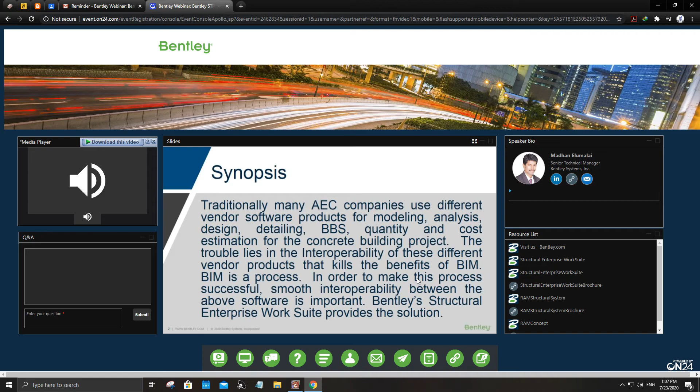So the synopsis for today's presentation is: traditionally we see many AEC companies use different vendor software products for modeling, analysis, design, detailing, bar bending schedule, quantity, and cost estimation for concrete building projects. The trouble lies in the interoperability of these different vendor products, which kills the benefits of BIM.

BIM, as many of you know, is a process, not a product. In order to make this process successful, smooth interoperability between the above software is important. Bentley's Structural Enterprise Worksuite provides the solution. And that's the synopsis for today's presentation.

In many bigger organizations, we see that BIM is getting implemented, but because of this BIM implementation, are you more effective than before or not? That is the important thing we need to find out.

One of the important things to make this BIM process successful in your organization's implementation is to make sure the softwares you use to complete the project are interoperable. If not, you'll be duplicating the work in the same office, and instead of gaining efficiency, you'll be losing efficiency, leading to BIM failure. So with that message, I'll move on to the next slide.

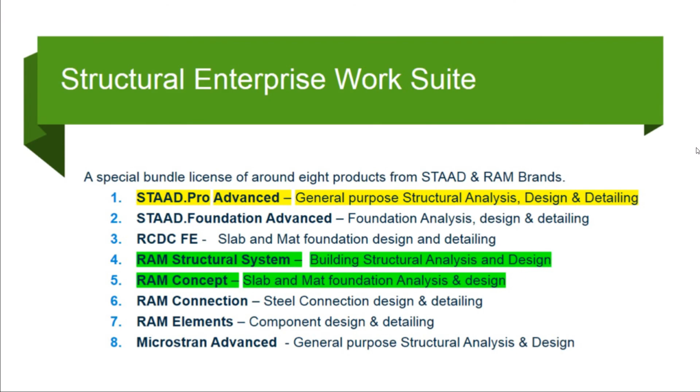So let's go into detail of RAM products overview. What structures are designed using RAM? Office buildings, residential buildings, education buildings, medical campuses, public structures, retail structures. Structural steel, reinforced concrete, post-tension concrete, timber, masonry, foundations.

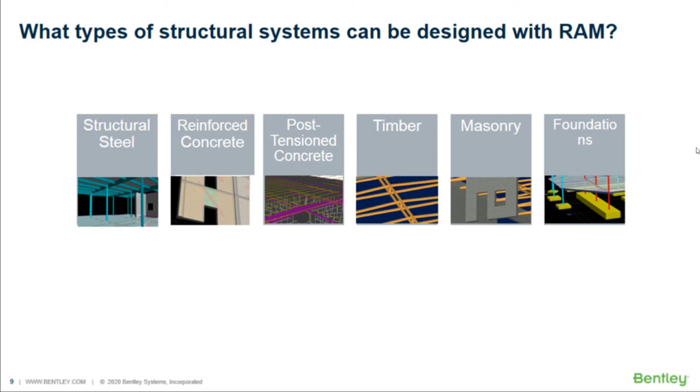Why use RAM? RAM, as I mentioned, is not a general purpose program. It's a special purpose program custom made for buildings. You cannot use this program for any other structure other than buildings.

Comprehensive implementation of building codes, such as live load reduction code, load combination code, seismic code, wind load code, as per all international codes, are implemented in this program. Extensive automation of tedious and time-consuming tasks like skip loading, alternate span loading for live loads on a 3D building, and many other time-consuming tasks are automated here.

Basically, RAM suite consists of four softwares: RAM Structural System, RAM Concept, RAM Connection, RAM Elements. RAM Structural System is for 3D modeling, analysis, and design of buildings, could be steel or concrete. Today we'll focus on concrete buildings and tomorrow on steel buildings.

RAM Concept for concrete slab and mat foundation, we'll see that today. RAM Connection for structural steel connection design, we'll see that tomorrow. RAM Elements, design toolkits for structural components, we'll see that on some other day.

So on the screen now you can see a 4-story building. The bottom 2 floors are made of concrete, the top 2 floors are made of steel. You can see the various RAM modules and RCDC used for analysis and design of this building. Basically, the whole building, including the steel and concrete and composite and non-composite floors and one-way and two-way floor slabs and flat slabs, are modeled in RAM Structural System as a whole model.

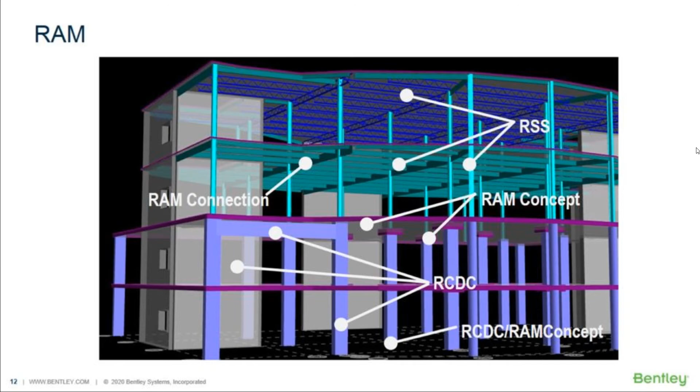The first case study is on Iraq. Here you can see the building. It is not the deflected shape of the building, it is the in-place condition of the building. This is a US $21 million landmark building project by Hamkar, consisted of 2 towers, each with more than 20 stories. The challenge was executing the vision of the architecture, which resembled falling dominoes, or in an alternative vision, a falling tree grounded by its roots. This project was designed by the consulting engineer Hawar Farhad Ahmed.

For such innovative architecture, RAM Structural System was critical for the team's analysis using finite element mesh. The project team collaborated by increasing communication across teams within a virtual workspace. The team achieved ROI by clearly defining the potential return from local investment, including reduced overhead, higher employee retention, improved operating efficiencies, and controlled pricing.

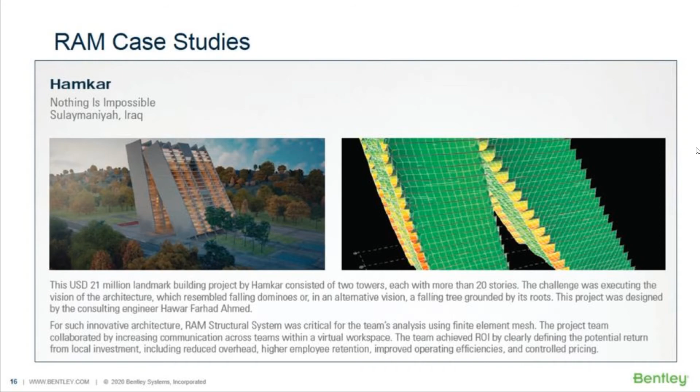It's a deluxe waterfront apartment development that addresses demand of upcoming upmarket housing. Wood and Grieve engineers provided structural analysis of unique architectural features such as the sophisticated facade and ground foyer. The building's radial layout with non-uniform column arrangement and slab design also required special considerations.

RAM structural system provided an efficient means to perform load takedowns and easily accommodate changes in the preliminary analysis phase. RAM concept allowed the floor design to be imported from RAM structural system to minimize repeat modeling. This improved productivity, so less time was spent building models and more time was spent evaluating scenarios. RAM's interoperability was an important factor in reducing cost.

So these are the cases submitted by these two users in our Year in Infrastructure projects in the past. We have taken from their presentation with their permission. So coming to today's presentation on concrete modeling, building modeling, analysis, design, and detailing.

I want to spend more time on modeling because the users here are not fully aware of the RAM structural system features. So first, let's see the first step, that's the workflow. We can do the modeling in either BIM softwares using Revit or Open Building Designer, or you can do the modeling in RAM structural system itself. You can see the two-way arrow.

After we finish the modeling and analysis in RAM structural system, we can proceed with the design using RCDC, and proceed with RAM concept for slab design and mat foundation design. The interoperability with RCDC is just one way, and the interoperability with RAM concept is two-way.

RCDC is otherwise called STAAD Advanced Concrete Design, which is part of STAAD.Pro Advanced, all part of the Structural Enterprise Worksuite license. So the way we model in RAM structural system is exactly the same way we model in BIM softwares like Revit or Open Building Designer.

So I'm going to use for this project the modeling in RAM structural system, importing and creating grids, and gravity and lateral modeling. After we finish the modeling, we do the lateral loading and analysis as step 3.

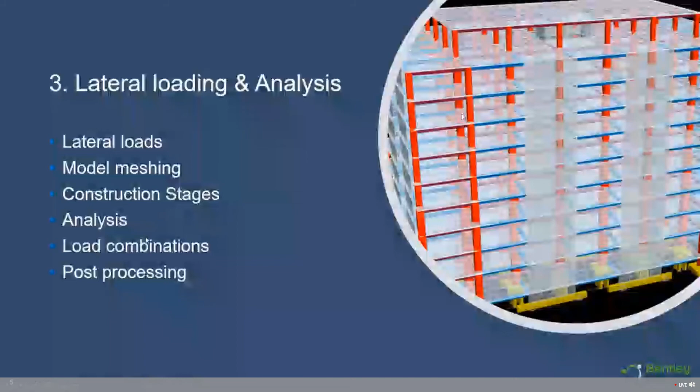We create construction stages here before we do the analysis, load combinations, and we do the post-processing. Stage 4, we do the concrete gravity analysis, this is for the gravity members. Stage 5 is the concrete design, detailing, and estimation. And stage 6 is the mat foundation design.

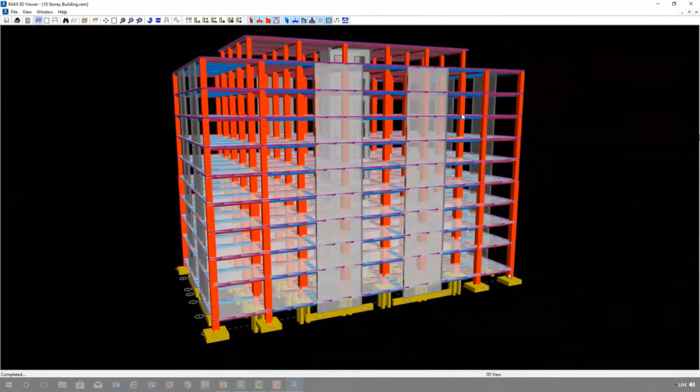So now we'll start the live demo, starting from number 2, that is modeling the building. I'm going to open up the already completed building before I show the modeling. So let's see this building. It's a 10-story building. The span is 6 meters by 7, so 42 meters in the X direction, and 5 by 5 is 25 meters in the Z direction.

In RAM structural system, we call it the X and Y direction in the plan, and vertical is Z, unlike STAAD Pro. You can see the red color members are lateral members, and some beams you can see blue color and red color. Columns are all red color. I model it everything as lateral columns. Shear walls are also lateral walls. And beams, most of them are lateral, some of them are blue, which is gravity.

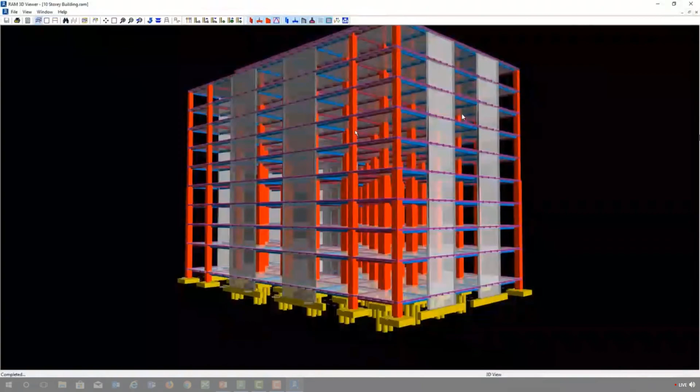And I model almost all kinds of foundations: isolated footing, combined footing, pile cap, and mat foundation. I also model the shear wall with openings.

Okay, so I hope now you have an understanding about this building, the 10-story fully concrete building.

Okay, so now I'm starting a new file, and this is the first screen where you see all the modules of RAM structure system here. All are empty right now. We are going to now start the modeling.

I use the RAM modeler and then choose the material. Here I'm going to use the concrete material. And then the first thing I'm going to do is specify the layout, the floor layouts. I'm going to use 2 floor layouts, typical one, and a roof for this 10-story building project.

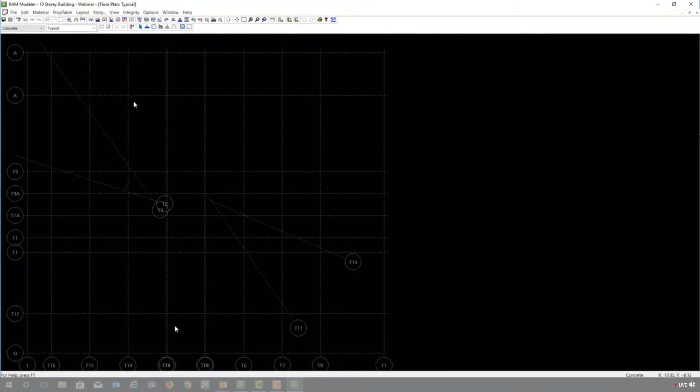So you see, I imported the grid from the CAD software, which includes orthogonal, inclined, and radial grids, so that I don't need to spend time creating the grids and can start creating the model. But for this project, I'm going to show you how to create the grids from scratch.

I'm redoing the floor layout creation, and now I'm going to create the grids manually so you understand both processes well. I'll create X grids, labeled in alphabetical order in the X direction: 8 grids with 6 meter spacing. In the Y direction, I'll label numerically: 6 grids with 5 meter spacing.

I'm going to insert a grid and name it 3.1, with a coordinate of 13 meters in the Y direction. That is a user-defined grid. Now we can visualize this grid here on the screen. Hope you are able to see the grids.

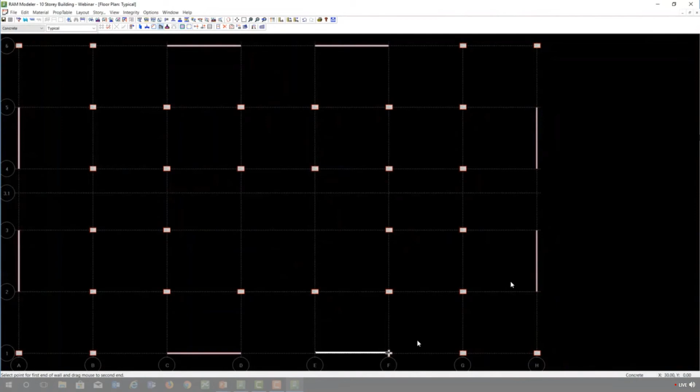Okay, let me continue. So now I finished the column modeling. Now I'm going to model the walls—just using the grid, I can quickly create the walls. I finished the walls on the 4 sides. Now I'm going to model the beams.

I'm modeling the lateral beams, shown in red, and also the gravity beams, shown in blue. I'm modeling these as gravity beams because one side connects to the wall and the other side connects to the lateral column, so achieving rigid connectivity with the wall would be difficult. That's why I'm using a simply supported connection where it connects to the wall—that's why I'm using gravity. But it's up to the engineer to decide whether to use lateral or gravity.

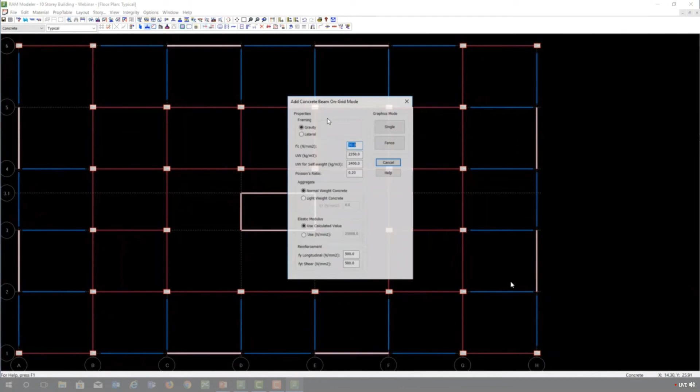I want to demonstrate the capability of modeling gravity members and lateral members in RAM Structural System, which is a unique feature I like a lot. A lateral member takes both lateral loads and gravity loads, whereas a gravity member takes only gravity loads. This way, the engineer has total control over the distribution of lateral load into the building.

So I finished modeling the shear wall lift core, and now I'm showing you the releases. You can see the gravity members have pin end connections. I'm going to modify some of the gravity beams that connect to the lateral columns using the Assign Beam Fixity command, so you can change the member releases.

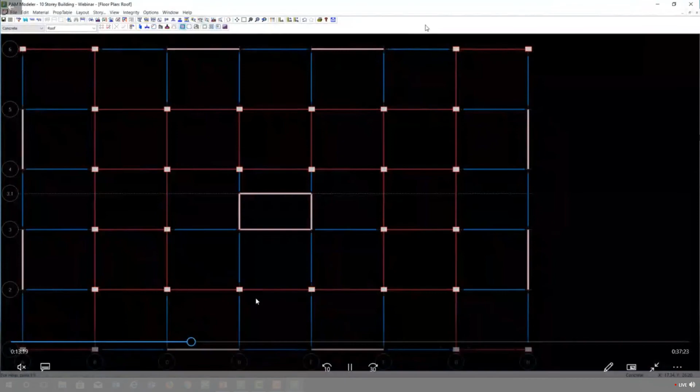I'm going to skip some of this to save time. Next, after modifying all the releases, I'm going to copy this floor to the roof and delete some of the members to create my roof floor layout.

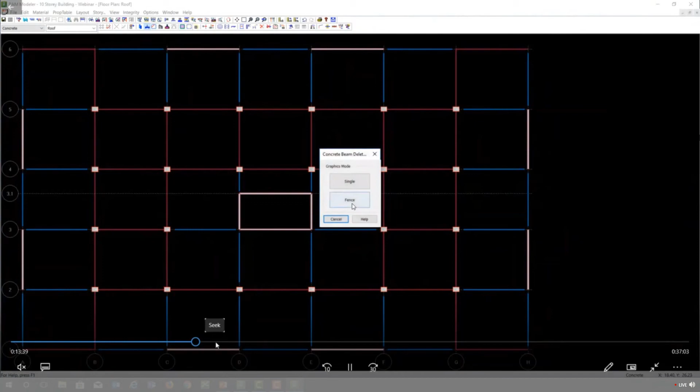Okay, so after I copy that roof floor layout, I think I skipped that copying, which is an important feature, so I'll show that now. Sorry for that, I'm trying to save time here because we lost some time sharing the video.

Using the copy feature, the story copy flow, I copied the typical floor to the roof. Now we are in the roof floor layout, which you can see in the top left. And in the roof floor layout, I'm deleting some beams and columns.

This now shows the slab modeling and the opening modeling in the slab. For the roof, I deleted the slab. I'm now going to delete some of the beams and columns. So the end result is going to look like this.

And now I'm modeling the slab. Just a few button clicks and your slab modeling is done.

Okay, so now we go to the story data to create the story. So now we have 3 floor layouts: typical, typical 1, and roof. Basically, typical and typical 1 are the same. So before going to the story data, I'm now going to give the column and beam properties.

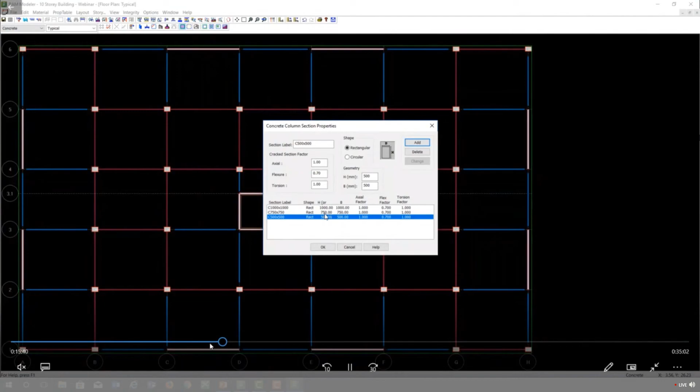We can also assign the cracked section factor. On the screen, you can see the axial flexure.

And for beam, I'm going to use the same beam size for the whole building. I'm going to use a T-beam, 400 mm depth by 230 mm.

The program will automatically calculate the flange width depending on whether it is an internal beam or an exterior periphery beam. So T-beam as well as L-beam property, the program will calculate it automatically.

And now I'm going to assign the slab thickness. You can see the deck slab property information. There are 3 tabs here: composite floor, which we are going to use tomorrow, but today we are going to just use it for the concrete slab system.

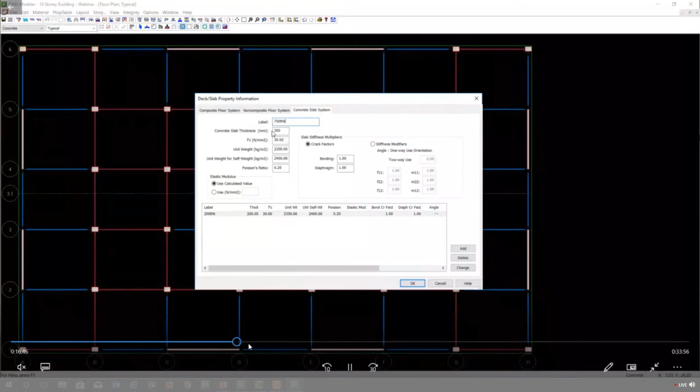I'm going to use a 200 mm thick slab. You can also specify the slab stiffness multipliers, crack factors, stiffness modifiers. And for mat foundation, I'm going to use a 750 millimeter thick mat foundation.

Okay, so two different slabs I modeled just now. And the slab, I'm going to assign this 200 mm thick slab for the whole floor as a two-way slab for both typical and typical 1.

Okay, for the whole floor, for roof also, 200 mm thickness. Next I'm going to assign the column sizes. Previously we just created them, and now I'm going to assign it.

Okay, so I fast forward it. So we finished assigning the columns and beam sizes and slab sizes. And now we are filling up the story data.

So here we specify level 1 as ground level and specify the floor to floor height as 1.5 meters - that will be my plinth level. And then from second level to sixth level, I generate by using the typical floor layout.

Okay, so this is how the program works. You model the floor layout in grids and then use the story data information to specify the height, floor to floor height of different floor types. And then you hit the generate button.

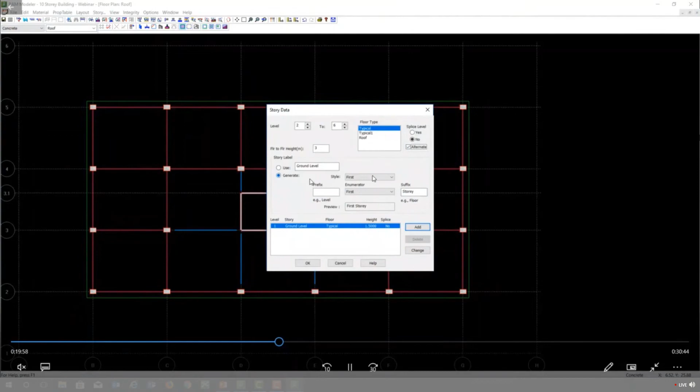Okay, so I generated all these floors: ground level, first story, second story, up to fifth story, sorry. The floor to floor height for all the floors is 3 meters, except the plinth floor, which is 1.5 meters from the foundation level.

And then I'm going to generate some more stories from sixth level, from 7th level to 11th level. The 11th level will be my 10th story.

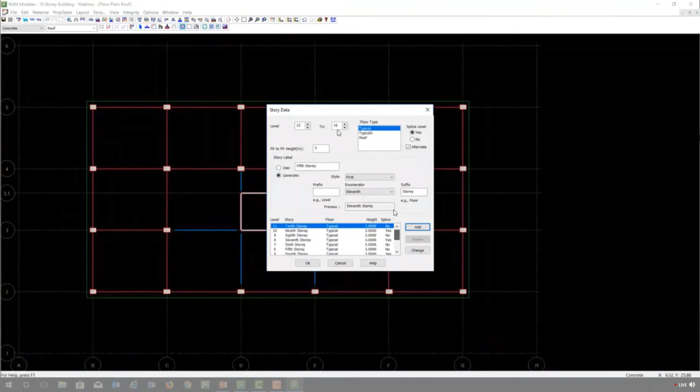The reason why I'm generating using a different floor layout is because I'll be varying my column sizes starting from my 6th story onwards. Again, for roof, I'll be modifying and reducing the column sizes. So that's how this story information helps a lot to assign the sizes.

Now that we specify the story information, we can see the 10-story building. You can see there are some mistakes in the model - the roof layout, I forgot to assign it for the 10th story.

I created it, but I forgot to assign it. So now you see the level 11, that is 10th story - I changed the floor type from typical to roof.

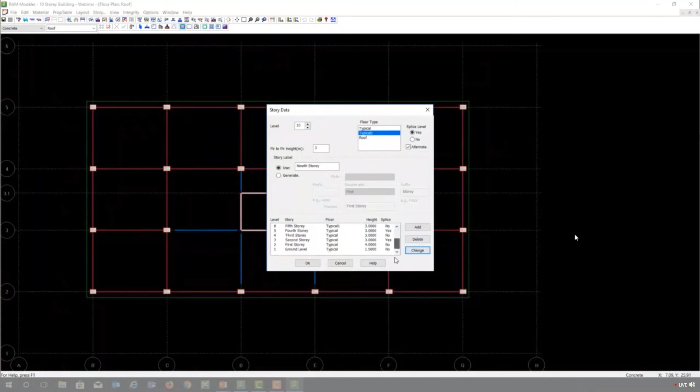Okay, and I also forgot to assign different floor types for levels from story 6 onwards to the 9th story. So that's typical 1. It's so easy to modify the floor layout by just using the single story data dialog. Okay, now I did the modifications.

Now we can see the 3D view of the building model, and you can see the roof is correctly assigned. Few other things are missing, such as the foundation details and the shear wall opening for the lift core.

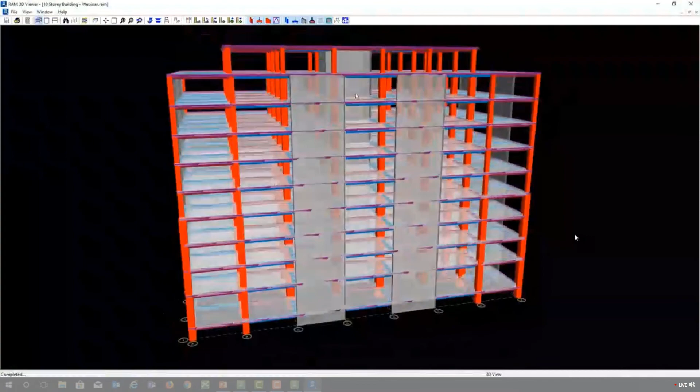So now I'm going to show you how to assign the foundations. First, I'm going to assign spread footings for all the corner footings, isolated pad footing. Next, I'm going to assign pile cap for all the internal footings, internal foundations. And then I'm going to assign combined footing for my shear walls.

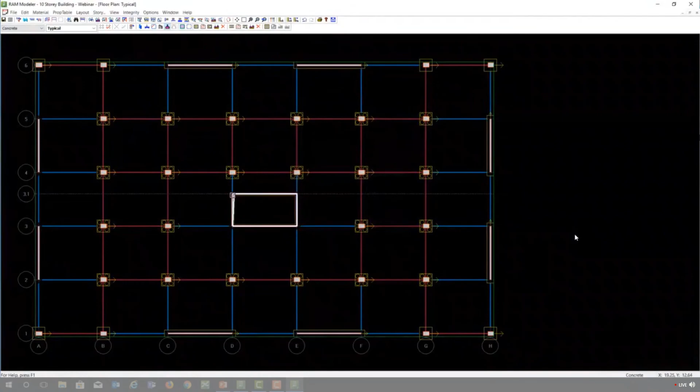And then mat foundation. See how easy I'm going to assign the mat foundation. I just specify the edge offset and click on the mat. You have to do it carefully here. Sometimes it's possible to make easy mistakes like clicking on the slab edges, slab opening edges instead of the shear wall edges. So you see the same mistake I did.

So I'm going to delete and redo it. I zoom in for better visibility. And then I'm going to show you clicking on the shear wall edge instead of the slab opening edge. Okay, so then the mat foundation is ready.

Okay, now I'm going to assign the properties for the mat. Remember, we also created a 750 mm slab, so I'm going to assign the mat foundation thickness. And the next thing we need to do is the creation of openings for the shear wall.

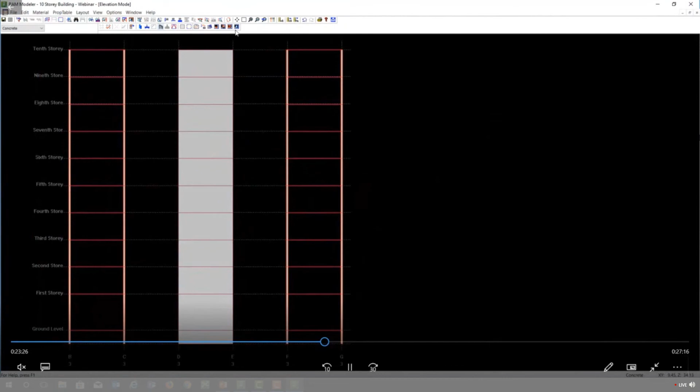So I select the elevation view and hit the Add Opening button. Compare this feature with STAAD.Pro, and then I hope you'll understand what I'm saying as a special purpose building analysis program. Imagine how difficult it is to create openings in shear walls in STAAD.Pro. See how easy it is to create this in RAM structural system. Not just creation of openings, but even copying and modifying the openings is so easy.

And you are working on a physical model here. So now you created the opening, and now let's see the 3D model with all the modifications, including the foundations and the shear wall openings.

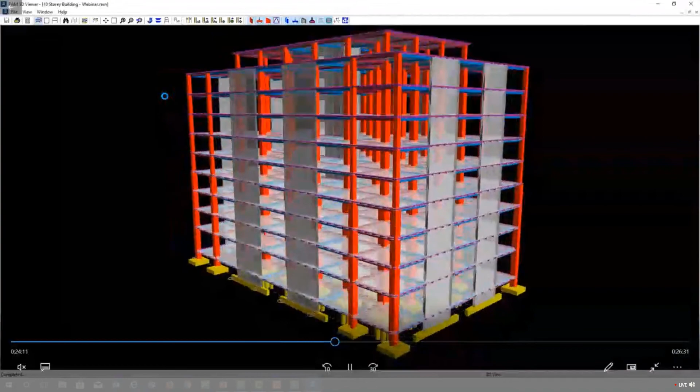So I hope you see this maximum. It took 20 minutes with all the delay in the video sharing the screen. We finished the 10-story building modeling, and now I'm applying the gravity loads such as dead load, live load, partition load, construction live load, mass dead load, etc. Note that the program will do the live load reduction automatically as per the code that we selected in our criteria.

So now I'm assigning the load for the floor layouts. For typical floor layout, I may have different loads. For roof, I may have different loads. But for this demo, I'm going to use the same load even for the roof.

So this way, we finished assigning the gravity loads. Note that you can also assign line load, point load, etc. in addition to surface loads. But for this demo, I'm going to use only the surface load. But if you have some overhead water tank, it's easy for you to assign the line load and point load.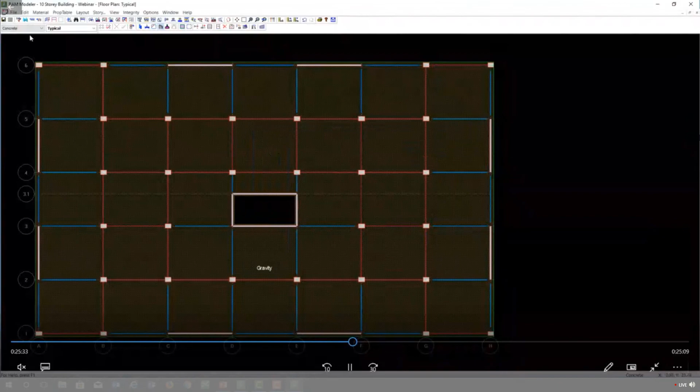Okay, so now after doing all this, I'm checking my model by performing the integrity check. There are no errors. So now we can see, I exit out of RAM Modeler, it's showing as green color, meaning the model is complete without any errors.

And now we need to do the lateral loading in RAM frame. Okay, so I open an already completed model.

There are a few other things that need to be modified, such as the member releases. So I open a completed model with all the releases correctly assigned. Note that you don't have to do this for your project. It's just to demonstrate to you the capability of modifying the releases.

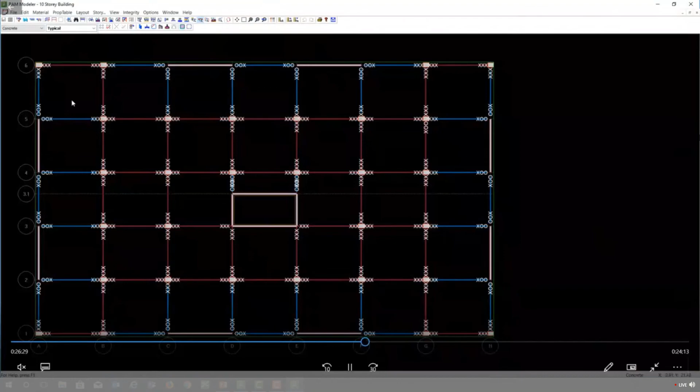I'm doing this because otherwise, when you use the gravity member, automatically the program will assign the pin end connections. And when you model the gravity lateral members, all are continuous connections, rigid connections. And here's a physical model, and here's the load cases.

So we can generate the wind loads, seismic loads, all the international codes, including all the editions of the ASCE codes are available here, including Euro code, UBC code, Australian code, Chinese code, Indian code, including notional loads also. We can also generate user-defined story forces if the code that you're following is not implemented in RAM structural system. You can calculate the lateral force and apply it as a user-defined story forces.

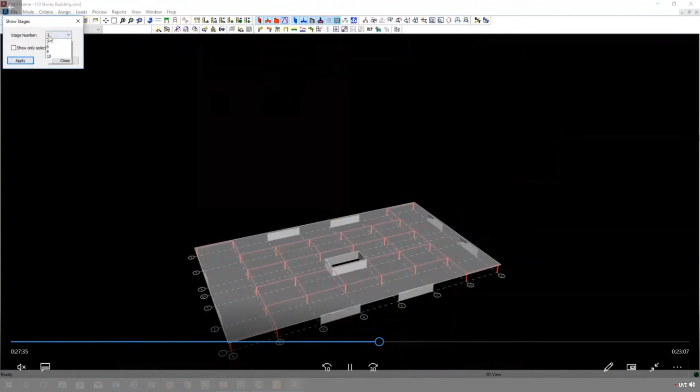We can also create construction stage analysis, which I already did for this example. I created 11 stages just at a button click. The program will automatically generate the stages. So a 10-story building, including the plinth level, is actually 11 stages. This is stage 1, that is constructing the plinth level, then stage 2, 3, 4, 5, till stage 11. Okay, so the program will automatically create this stage construction analysis and store the results for different stages.

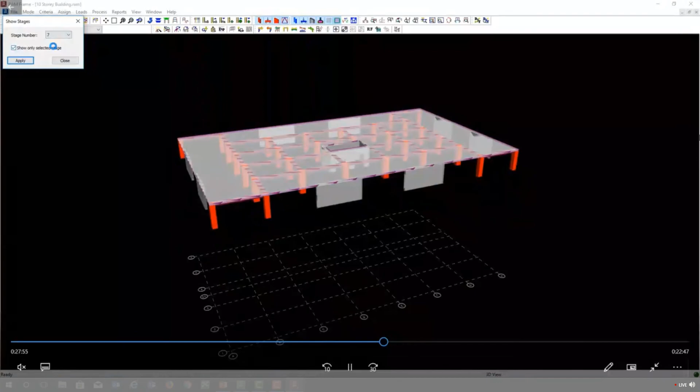Okay, so now we can generate the mesh for the model. The wind load I used is Eurocode, but you can use any other code. This is the typical dialog box for the wind load. You can just specify the basic wind speed and the directions and some of the fields required per the code. For example, here I'm generating the seismic load, static seismic, so I specify the design ground accelerations and the directions. The program automatically generates the seismic loads.

That's it, and now I rebuild the mesh data. Now the whole physical model is being meshed as finite elements. This is the beauty of RAM structural system. Modeling is so user-friendly: you model the slab as slab, wall as wall, and then click a button, and it will convert into a finite element model. That's it.

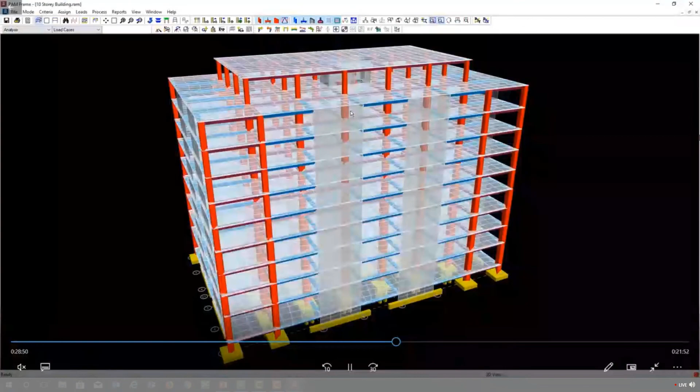Now you can see the mesh. By default, we use 1.5 meter coarse mesh. The user can change the mesh size, but we have done several benchmarks, and we noticed that for global analysis, a coarse mesh size is good enough. The stitching between the meshes happens automatically in the program, so we don't need to do any modifications in the default mesh generation.

And then we do the analysis, select all the lateral loads. The gravity loads are already brought from RAM modeler. And here we are doing the finite element analysis. It just took 2 minutes, 1 minute 45 seconds for completing the analysis. And after we do the analysis, we generate the load combinations.

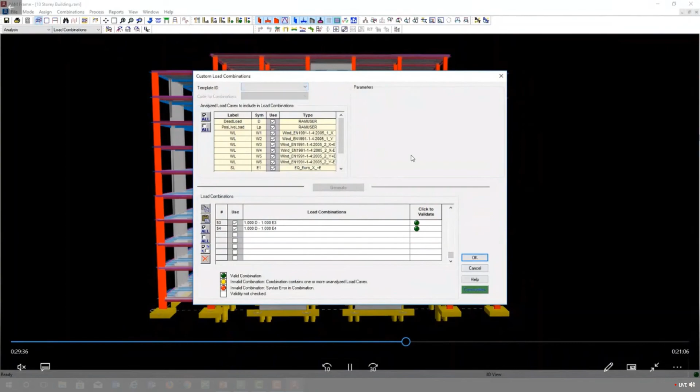And now we can see the deflected shape for any load case, primary load case or load combinations. I reduce the scale factor to 100, so we enlarge it 100 times. So the deflection value you can see is 15 millimeter. And we can animate it.

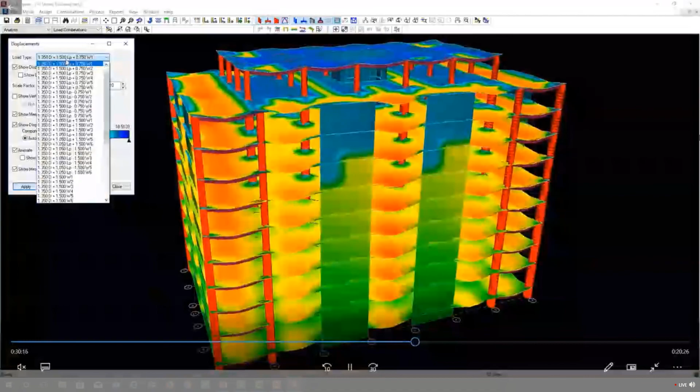And we can view it for other load combinations as well. So this is for dead load, live load, and wind load combination. We can also view the member end force diagram, shear force diagram, bending moment diagram, axial force diagram. But just to save time, I'm going to skip that.

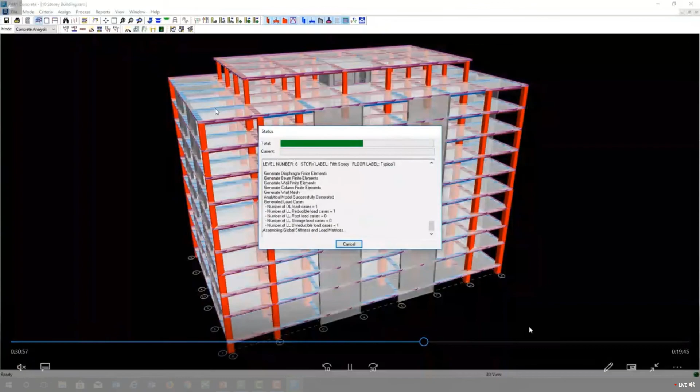Now we move on to the concrete gravity analysis for analyzing our gravity members and also for load takedown for each floor due to gravity load. Okay, so after this analysis, we can see the gravity load takedown from top to bottom. Floor wise, we can check the reactions.

Okay, so here you can see this is ground floor. Sorry, let me rewind it slightly. So here's the top floor. Okay, vertical reactions for dead load, this is a top floor vertical reaction.

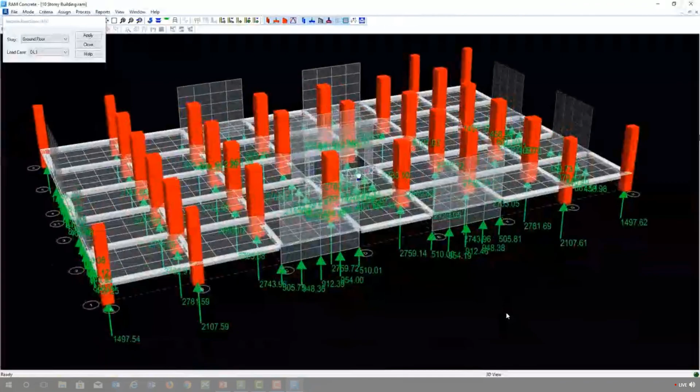And here's the 9th story, here's the 8th story. For dead load and live load, we can do the same check, how the load is distributed from top to bottom, the load path. As we move down, you can see the load intensity, the reactions increase.

So we now finished all the modeling and analysis and load combinations in RAM structural system. Now we need to proceed with the design. So for design, we can either use RAM structural system or RCDC. For this project, I prefer using RCDC because the design and detailing features of RCDC are better than RAM structural system. So I use RAM structural system only for modeling and lateral load analysis and gravity analysis, and for design, I'm going to use RCDC.

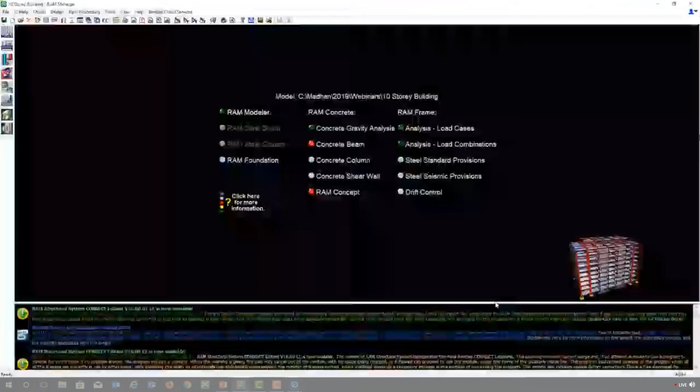Some of you are familiar with RCDC already. For those who are not familiar, RCDC is part of StaadPro Advanced. And now with the latest release of StaadPro, the basic features of RCDC are even part of StaadPro Basic version. So please make sure you update your StaadPro to the latest version 22 Connect Edition, and then you see a third option to use StaadPro Basic. But you need to launch it from StaadPro itself, not as a standalone RCDC.

Okay, so now I'm closing the RAM structural system model, and I'm going to choose the code here. So I can choose the Euro code or American code or British code or Indian code. The latest version even has the ACI 2014 imperial units. The version which I'm showing now was recorded a few months before, so it was using the Eurocode 2004 code.

So I'm going to choose the model which we just finished analyzing in RAM structural system. Takes a little bit of time, let me fast forward that.

And then after the import is done, you choose the design element which you want to design. I'm choosing column and wall, and RCDC is now getting ready for the design of column and wall. It's reading all the analysis results, including the stage construction analysis results from RAM structural system. That includes the creep and shrinkage of concrete. Okay, so now we have the column and walls imported in RCDC from RAM structural system.

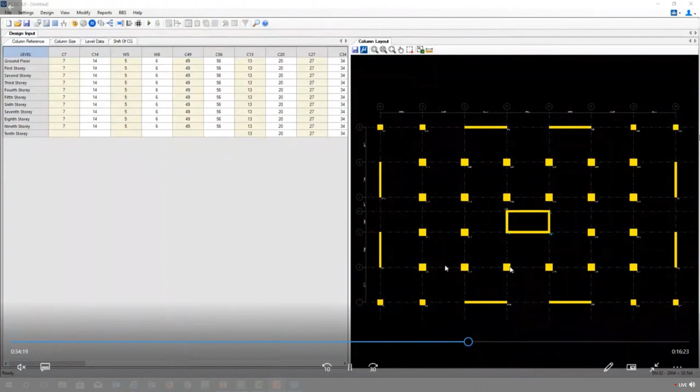Use the settings button to specify the design settings. You can perform the ductile design, and you can also design for crack width, and specify the bar sizes available in your country, the minimum and maximum bar sizes. You can choose from the rebar number or rebar diameter.

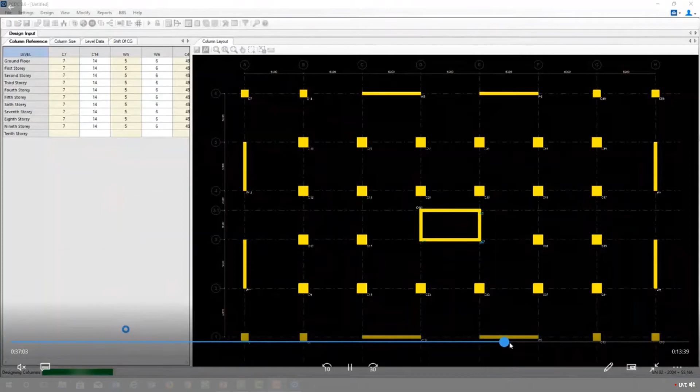Specify the settings and choose the design code, then hit the auto design button. Now the program is performing the concrete design. Here's a spreadsheet showing the results. On the left side, you can see all green color, meaning all the columns are passing.

Instead of using this several rows of spreadsheet, I'm now performing the grouping for the entire building, so all similar column sizes and similar reinforcements will be grouped, so that instead of having hundreds of rows, we now have only fewer rows.

Here you can see the columns and walls, main reinforcement and links on the right side, and the capacity ratios. And here we generated the text schedules. There are two types of text schedules.

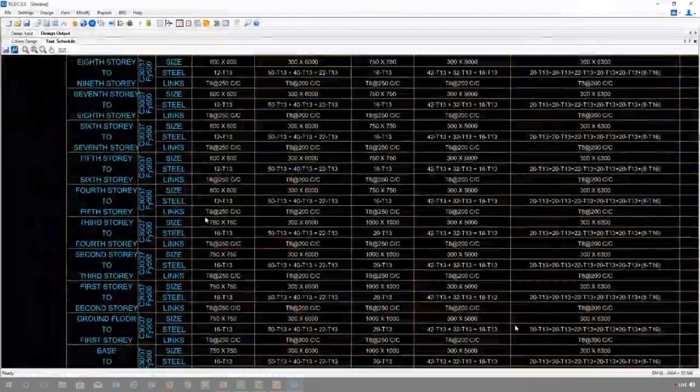Here is the text schedule that shows the grouping of the column. This is a non-ductile text schedule. We can also produce a ductile text schedule as well for the column design.

With a few more button clicks, you generate this detailed drawings for your column cross sections and shear walls.

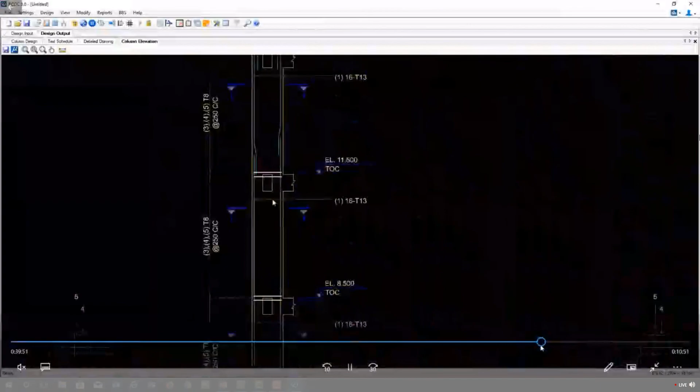With a few more button clicks, you generate this column elevation detail drawing showing the laps.

With a few more button clicks, you generate the summary, the design summary. Just a few pages for the summary, and then one more button click to show the design calculations.

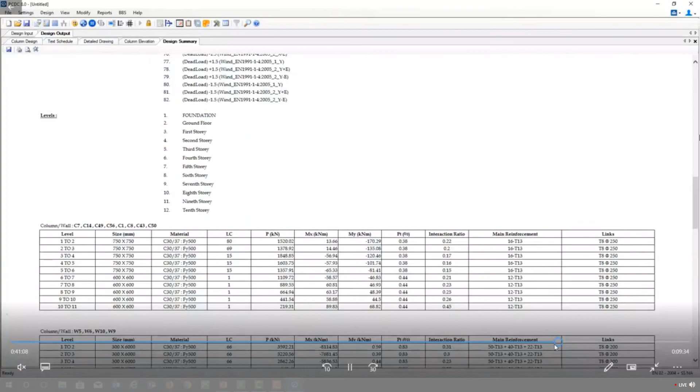You can choose for the whole building or only for selected members for the calculation report. Here's the design calculation report, showing you all the step-by-step calculations, including the formulas and codal references.

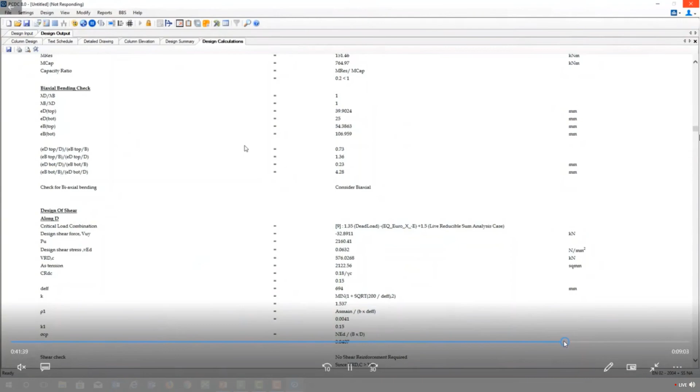Next is the bill of quantities. The program now knows the length and sizes of all the concrete members, so it should be able to calculate the quantity, the volume, and the cost.

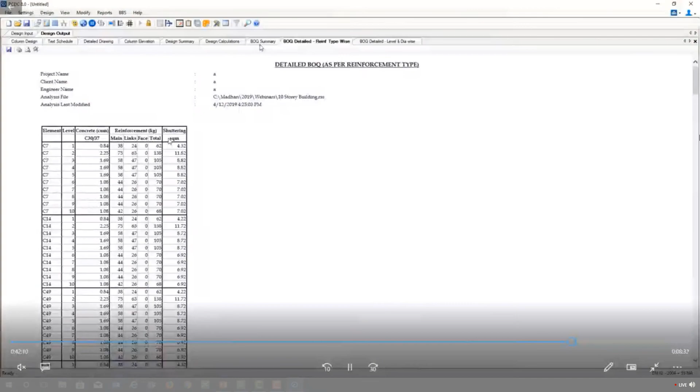You can choose the currency. Note that the currencies available are limited now, but you don't need to worry. If your local currency is not available, you can choose any currency, but put in the local rates, and then once you produce these reports, you can edit the currency symbol in your Excel or MS Word report.

So this is the estimation we did for a column that includes formwork also. But if you do estimation for the foundations, that will include the excavation also.

So within a few minutes, we generated text schedule, detailed drawings, column elevation drawings, design summary, design calculations, and bill of quantity in three different formats.

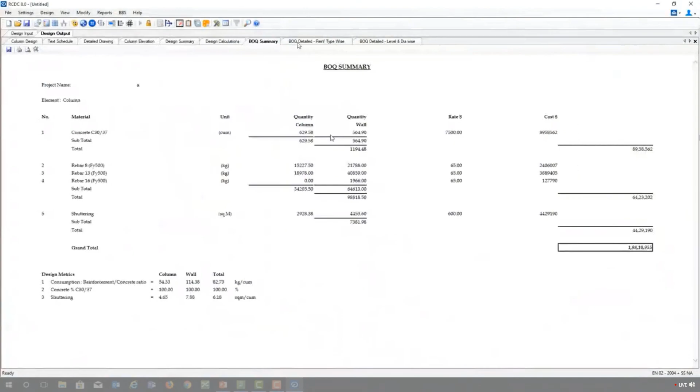We can save this as DXF files, or you can open it in Bentley MicroStation if you have MicroStation installed in your computer, or just save it as a DXF file and open it in any CAD software.

So now we have finished the column design and wall design in RCDC. The same way we can design the beams, slabs, and foundations.

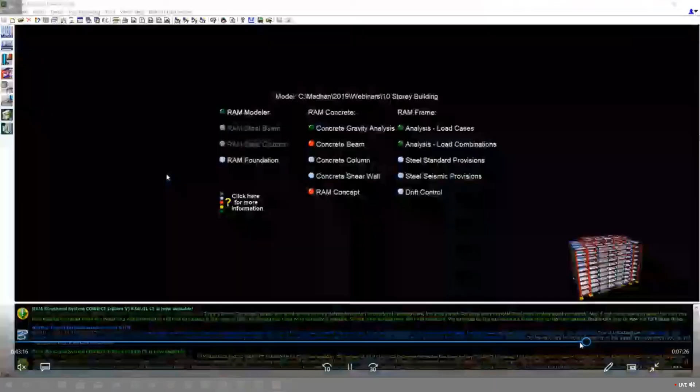So we finished step 5. Next is step 6, that is mat foundation design. So I'm going to use RAM concept for that. From RAM structural system, we now select RAM concept, and then we can choose to design mat foundation or elevated slabs.

RAM concept can do both. Note that both RCDC and RAM concept can design the slabs, but the difference between these two programs is RAM concept uses a finite element method, whereas RCDC uses the coefficient method as specified in the code. It uses the empirical formulas to design the slab.

So depending on the complexity of the slab and depending on the span of the slab, you may either choose to use RCDC or RAM concept. But RCDC is limited to only one-way and two-way slabs, whereas concept can handle any type of slabs, including flat slabs and post-tension slabs.

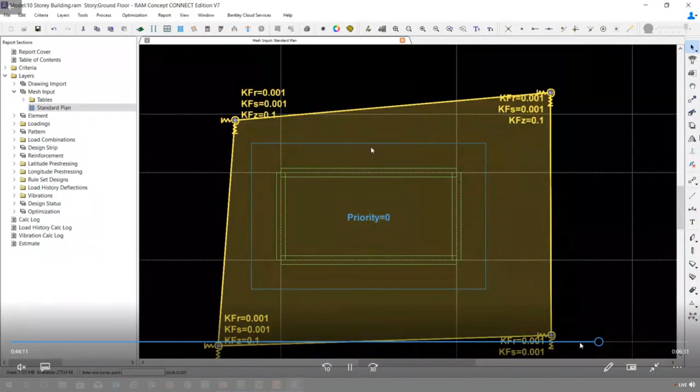So this is the mat foundation which we imported from RAM structural system. Remember the lift core; the lift core is also imported. And here we specify the soil subgrade modulus. The program will generate the spring automatically.

And here we do the mesh, just a crude mesh to start with. And then I generate the design spans and design strips to analyze my mat foundation in both directions. I generate the design spans and design strips.

So once we do this, we go back to the mesh and we regenerate it. After the design spans and design strips are generated, you can see the mesh is very smooth now. And now all we need to do is run the analysis. The program will use the compression-only springs for this mat foundation and do this finite element analysis.

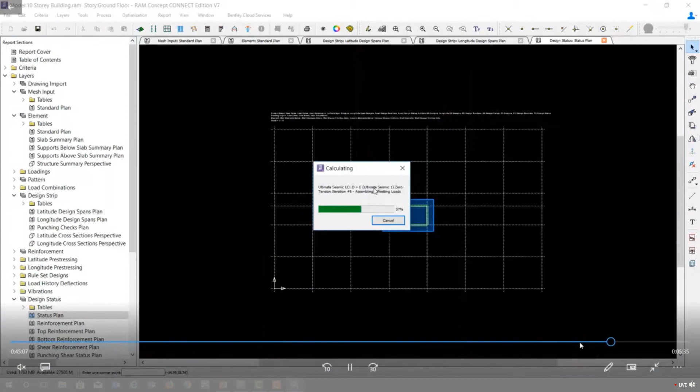For all the load cases and load combinations imported from RAM structural system, there is a beauty of this interoperability between these two programs, so that we don't need to spend more time recreating the mat foundation. It's all imported from RAM structural system, and finally RAM concept says that the mat foundation is okay.

But then we need to go and check the base pressure, the soil base pressure, and the reinforcement, etc. If the base pressure is exceeding the soil bearing capacity, then we need to increase the area of the mat foundation and reanalyze.

So here you can see this is the soil base pressure. The maximum value is 249 kilonewton per meter square. Definitely this will exceed the safe bearing capacity of the soil. So I need to increase the area of the mat foundation and redo the analysis until the maximum base pressure is less than the allowed value.

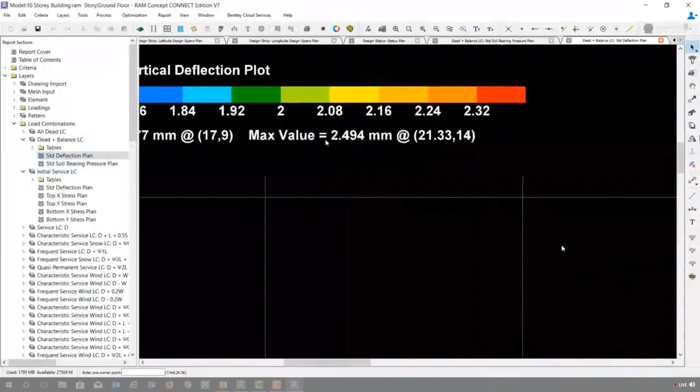And this is the deflection diagram. We have 2.5 millimeter deflection, which is okay. We can see the results for ultimate load cases as well as service load cases. We can now see the bending moment diagrams for our mat foundation, and we can cut a line from this contour to view the graphs.

Okay, so those are the capabilities. Finally, we can see the reinforcement in 2D, and we can modify this reinforcement provided by the program.

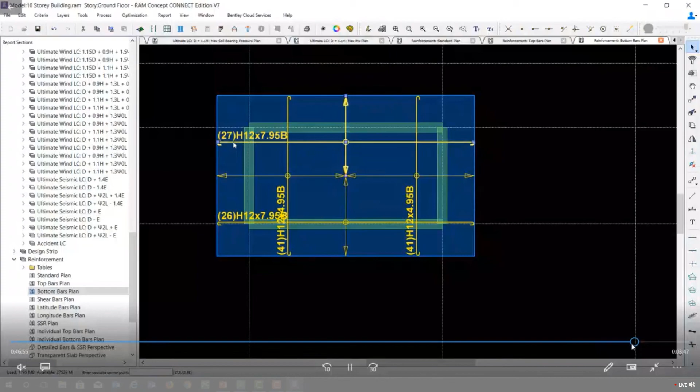You can change the way it shows. You can modify the diameter of the bar and show it as user-provided reinforcement. Then the program will change the color from yellow to orange, explaining that yellow is program designed, orange is user modified.

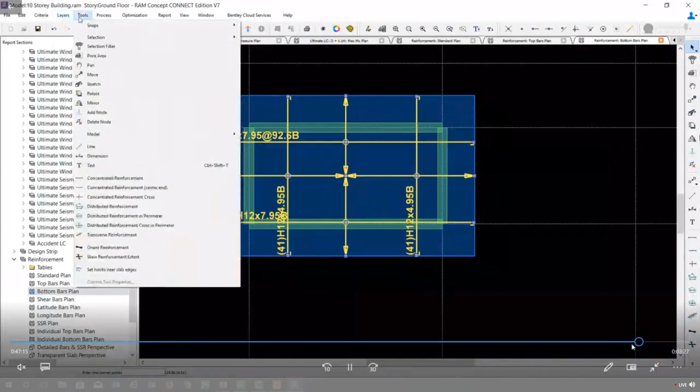Usually what I do is I delete the reinforcement designed by the program, and then I use this tools menu to provide my own reinforcement and use these calculation options to check capacity of user reinforcement without designing additional program reinforcement. That way, I have total control on the reinforcement provided at the site, so it can be managed easily in the site.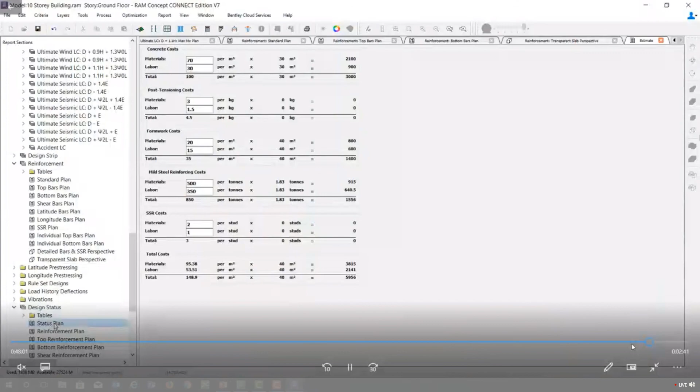And finally, you can walk through the reinforcement. And estimation - this estimation tool is very useful to compare if you're designing a slab as a reinforced concrete slab or a post-tension slab. By designing the same slab as a post-tension slab, you may reduce the thickness, but the labor cost will be more. So the estimation page will help you come to a conclusion to choose the scenario.

Okay, so now that we finished designing this mat foundation as a reinforced mat foundation, we can save this detailing in a DWG file, close RAM concept, and come back to our RAM structural system. And with that, we have finished the mat foundation design.

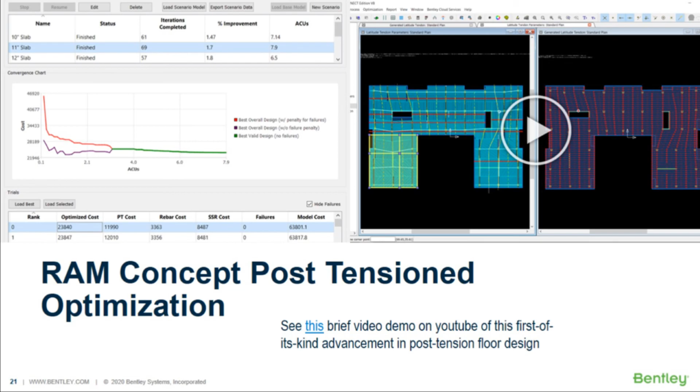And the new features in STAAD Advanced Concrete Design RCDC is the implementation of the ACI Imperial codes. Previously it was available for metric code, but now we also have the Imperial. And now we also have the ACI 224R-01 crack width checks and a few other minor important features.

Previously, when we used this RCDC along with StaadPro, we needed to model the shear wall as a column in the StaadPro model, but that limitation has been removed now. Now RCDC can import the shear walls modeled as surfaces in StaadPro, either using the StaadPro physical modeler or the analytical modeler, using the parametric surface command. Those are the improvements in the latest RCDC.

Next, coming to the important topic, BIM interoperability.

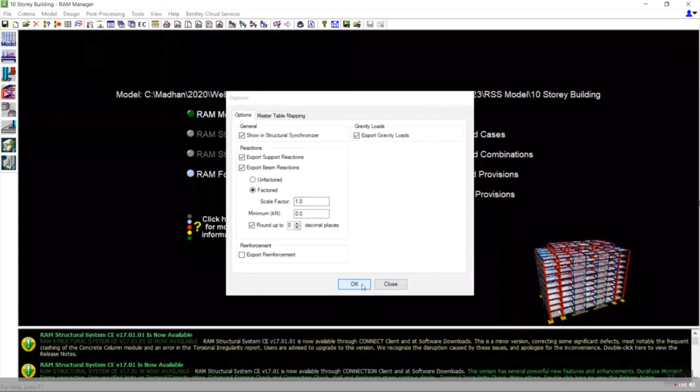Okay, so this ISM has the option to export even the RAM Concept slab design. We use two programs, RAM Structural System and RAM Concept, to design this building, so ISM will take care of both.

Note that this ISM is capable of even exporting the reinforcement design, provided the reinforcements are designed using RAM Structural System. But in this case, I have used RCDC, an external program, to design the reinforcement for my columns, so the reinforcement is not exported.

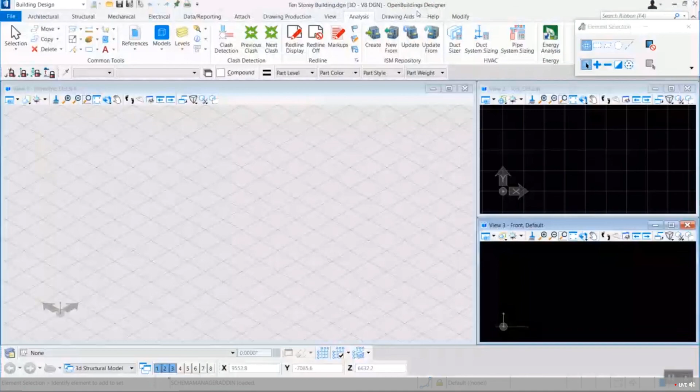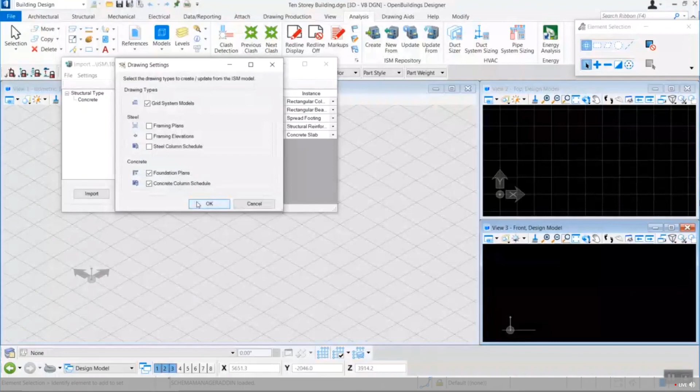Okay, so now I'm opening OpenBuildings Designer, Bentley's multidiscipline BIM modeling program. Here I use this Analysis menu and select New from ISM Repository, then a few settings, and hit the Import button.

The mapping is not needed because both these programs belong to Bentley. But if you use Autodesk Revit, you just need to spend a little bit of time on the mapping. For concrete, there's not much mapping required, whereas for steel, mapping is required.

Okay, so you can see the columns, walls, slabs, all are imported, including the floors. So the complete model is getting imported from RAM Structural System into Bentley's OpenBuildings Designer, including the grids.

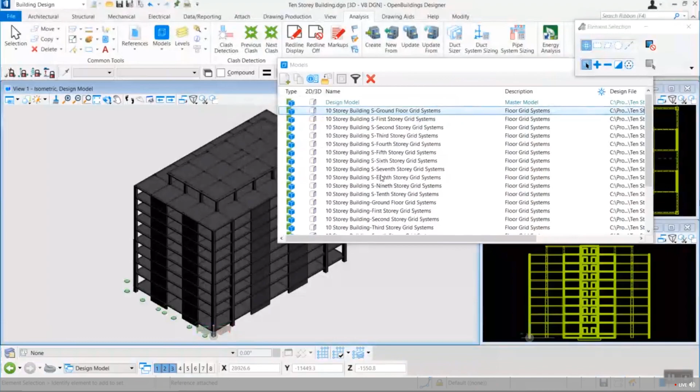Why do we need to do this? Once we have the structural model in a BIM program, we can reference this model with other disciplines such as architectural, mechanical, electrical, plumbing, etc., so that you can perform clash detections and quantity estimation.

So here you can see I'm using the spreadsheet feature in OpenBuildings Designer, the structural quantity report feature, to calculate the complete lengths, volumes, and weights of all my concrete components: columns, beams, walls, slabs, foundations.

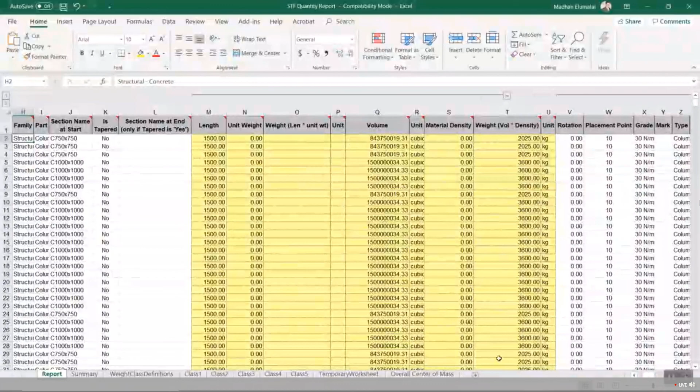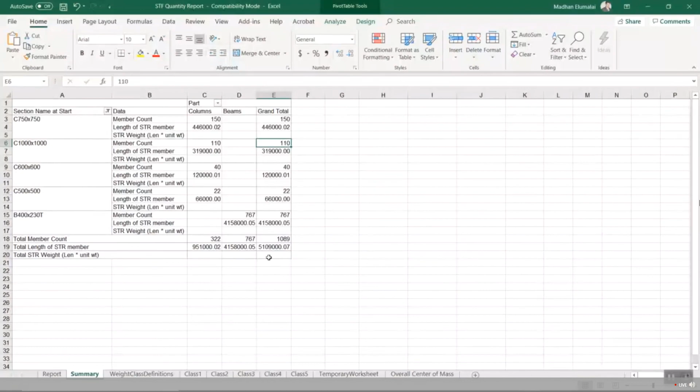The complete details are now available in the spreadsheet, and with just a button click, we can easily summarize automatically. So here you can see C750 by 750 column - I have so many of these, and 1 meter by 1 meter I have so many, and 600 by 600, 500 by 500. So very easily we can summarize.

And then we can use the drawing production tool in OpenBuildings Designer to create any drawings you want, like cross-section or elevation drawings. But this is not an OpenBuildings Designer presentation - I'm just showing you the import feature.

Okay, so watch out for a seminar on OpenBuildings Designer to know more about that program. So we come to the near end of this presentation.

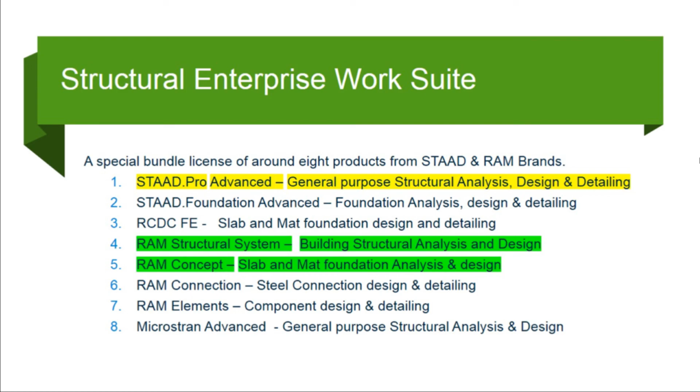This ISM installation is free. You can just install a Structural Synchronizer. Most of the programs are Bentley programs - it installs automatically when you install STAAD.Pro or RAM Structural System. But for using it with Revit and Tekla, you just need to Google search ISM plugin for Revit or Tekla and download it for free and install it.

So completing a concrete building design project requires several softwares, varying from BIM modeling, structural analysis, design, detailing, bar bending schedule, quantity. I forgot to show the bar bending schedule in RCDC, but you can also do that in RCDC - just because of the time restraint I skipped it.

With the button click, you can generate the bar bending schedule for all the concrete components, even in spreadsheets as well as drawings.

Bentley Structural Enterprise WorkSuite gives a bundle license which helps complete the project with one license. The ISM technology helps in interoperability between the structural analysis and BIM program. So with the help of the above Bentley structural technologies for concrete buildings, we can finish our concrete building design project more efficiently and at an affordable software cost.